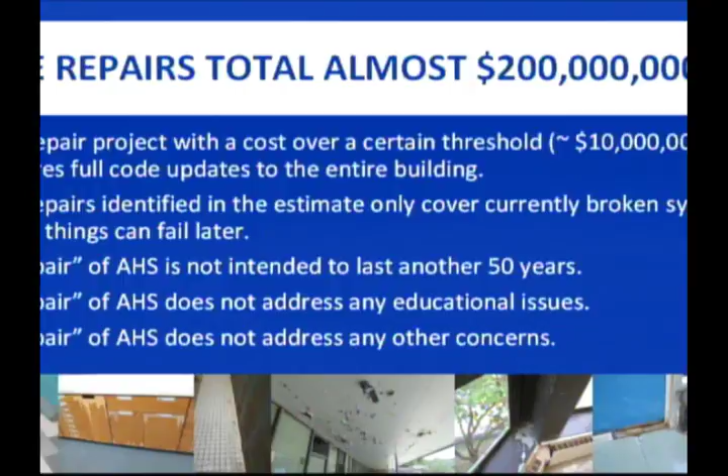So the heating system is nearing failure. It's going to require not only the replacement of the boiler, which is on its last leg, but also the replacement of all those heating pipes. To replace the heating pipes, you have to rip out the floors. That entire project will cost over $10 million, certainly.

Once you spend that $10 million on the heating system, you now have to bring the building up to code. You have to do things like rip out the auditorium because the grade in the auditorium is too steep under ADA. You also have to address egress issues—there are plenty of parts of the building that don't have a second exit. So you have to start worrying about things like that.

The building has multiple levels all over the place, and all of those have to have ramps installed. We have to put in a fire suppression system. But the height of the ceiling is too low to put in the ductwork for both the fire suppression system and a new heating system, which means you're going to have to raise the roof on the building.

So once the heating system goes, all these other projects become a requirement, and all of that adds up to $200 million.

It's important to note that that $200 million is just a repair of things that are broken, not a repair of everything in the building. It doesn't address any of the educational issues, and it doesn't do anything else. A repair option is not designed as a 50-year option. So that $200 million is not buying you a new building, it's buying you a Band-Aid on a very old building.

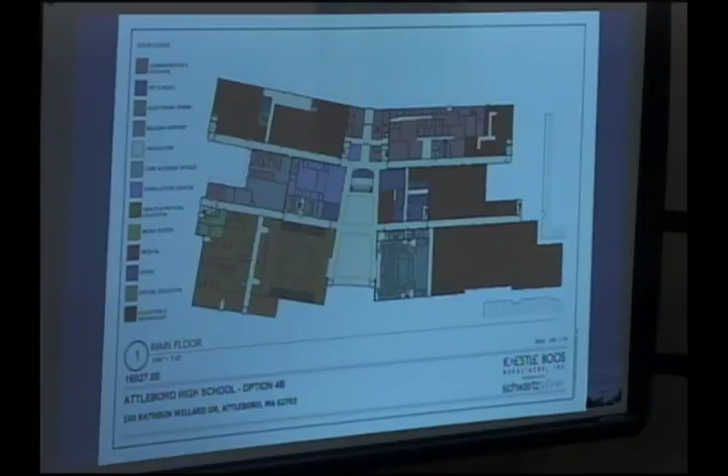The other CTE programs are over here. Autos right there, so people will be able to drive in and out. You'll notice the gymnasium here with locker rooms, and this is the auditorium. So basically you have a central spine that allows circulation between the different parts of the building, and then you have these different sections down on the first floor.

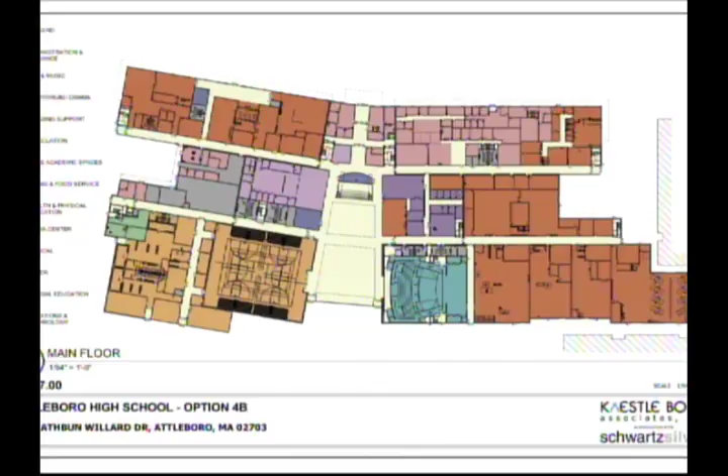No academic classrooms on the first floor, but lots of these other programs. And this wall right here is a glass wall that you'll see a little bit later that opens out onto the stadium right here. So we really believe it's going to integrate very nicely with the site as it already exists.

Any questions about the first floor? Anybody have any questions regarding the first floor?

Okay, so if we move up to the second floor, we see the continuation. This is still the gymnasium, actually that's a two-story structure. Again, the auditorium has a balcony, so that's also a two-story structure.

We have a few more CTE programs on the second floor, on top of them over here. We have art classes here, nurse's office. You'll see that the cafeteria is open to the second floor, and there's a balcony around it. Again, that really helps to create a wonderful space.

Over here we have our alternative programming, the ACA and the network. And then now we move up to the front of the building, and we start to see the definition of our academic spaces. You'd bring network to the high school? Yes. Excellent, thank you.

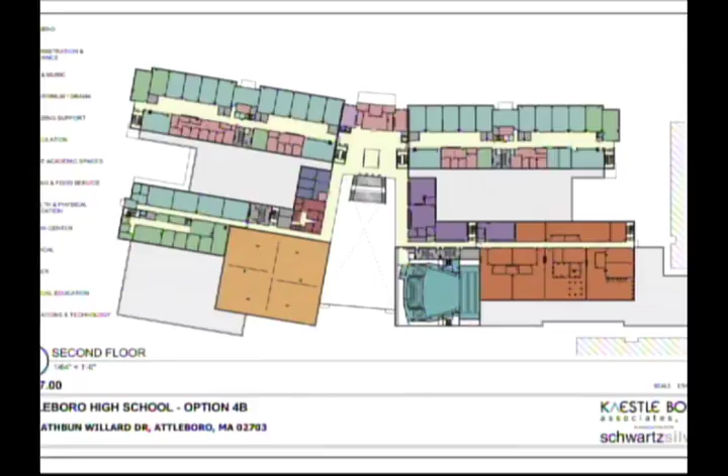So you'll notice, these are administrative offices for the high school. The Attleboro High School is broken currently into houses. Those houses help us to break down the scale of the building.

One of the things we know as educators is that the relationships we make with kids make all the difference in terms of their overall academic success, and that while there are great advantages to having a large high school like Attleboro High School, it allows us to offer programming that other schools couldn't possibly do because of economies of scale. One of the downsides to having a large high school is that it can feel very large, and you can easily get lost in a building of that size.

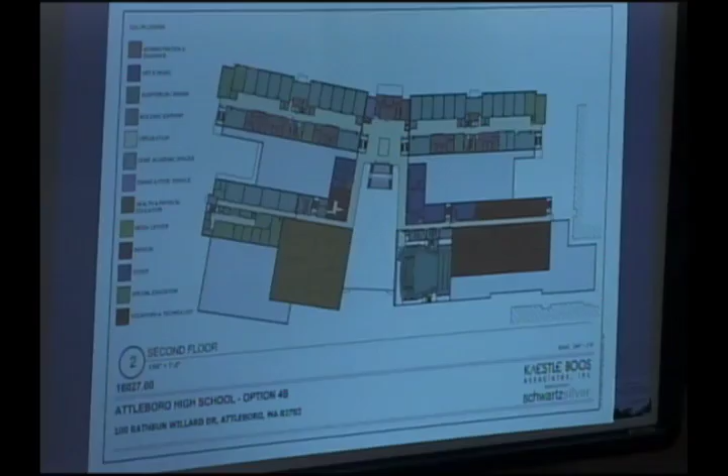So by breaking the building down into houses, we try to create smaller scales so kids can get to know people and make those relationships. We already have that structure, although I have to tell you, the layout of our current building really sort of undermines our ability to make the most of those structures. This building is designed specifically to capitalize on those houses. So you start to see how we have 4 houses, and they are defined structurally by the building, and they are vertical.

So they exist, all 4 of them are on each of the 3 academic floors, the second, the third, and the fourth floor. They go vertically. Each of them has their own house office, so 1, 2, 3, 4. That's where the dean's offices would be, and these are academic classrooms. Again, this would be the classes for this house, this would be the classes for this house, and this house.

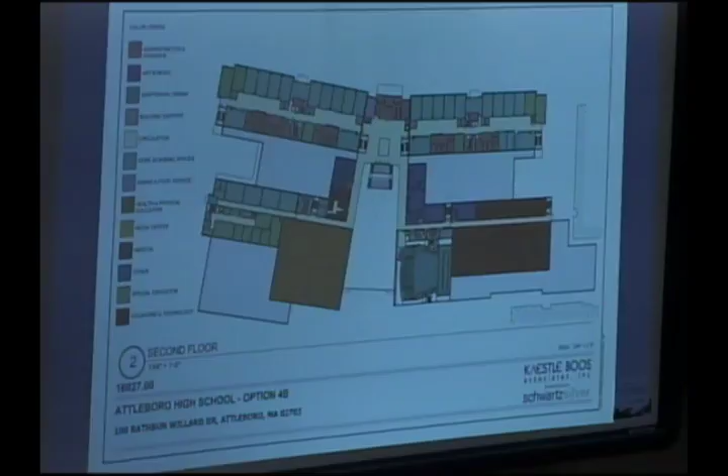All right, so I'm going to go up to the 3rd floor unless there are any questions. Are there any questions on the second floor? Again, if you have questions, just raise your hand and let me know so I can send them to Mr. Sawyer. Okay, going to the 3rd floor.

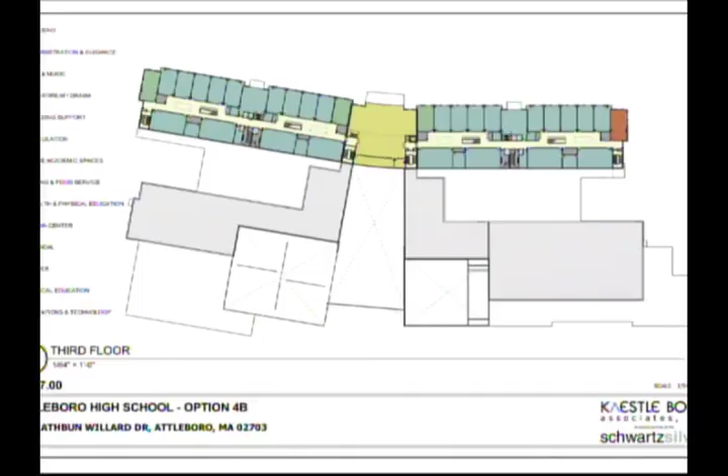So when we get to the 3rd floor, we're now just up in the front of the building. And again, we see the further development of these houses, the structure of the 4 houses. We have a media center in the middle of the building, centrally located. We also have stairwells up to the 4th floor in each house, which helps connect the houses vertically, and also helps bring natural light down from the 4th floor into the 3rd floor, which we think will create a nice, pleasant environment that allows kids to use the flexible space we've created in the halls for collaborative work in breakout spaces.

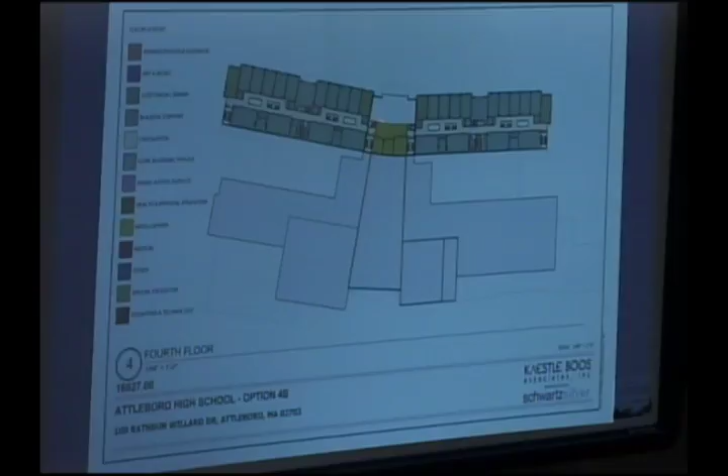And then up on the 4th floor, it's more of the same with the different houses. Again, the media center is in the middle, and it has a balcony that's open down to the 3rd floor, and this is up on the 4th floor. So that's the floor plan for the building.

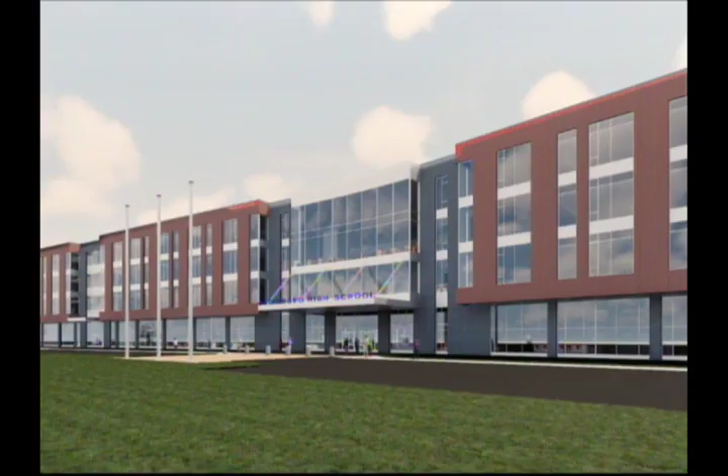Okay, thank you. So here's what it looks like when you step outside of it. This again is the front of the building. So we're over kind of near Rathbun Willard Drive, and you'll see the definition of the 4 houses. They stand out in the design, so you can see them visually from the building.

You have the central clear location. I tell you, it's one of the toughest things about Attleboro High School: when people who don't know the building come there, they don't know where to go, they don't know what door to go to. Literally on the way out the door today, someone stopped me and said, I don't know where to go, where am I, I'm supposed to be here. We think it's a huge advantage that we're going to have a very clearly marked front entrance so people know how to get into the building. It seems like a simple thing, but it'll be an improvement.

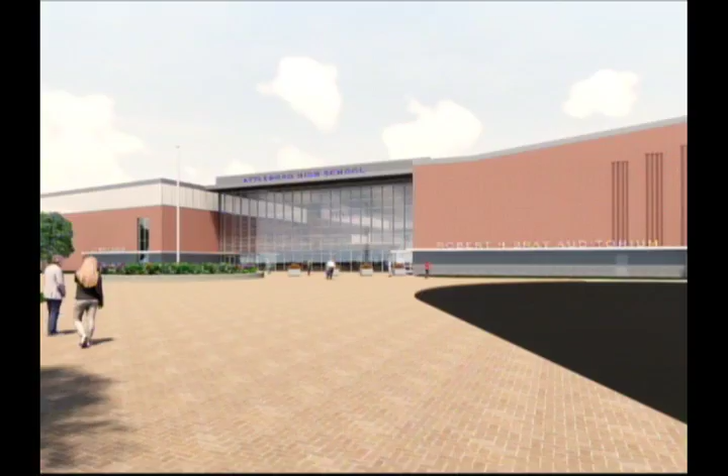And you can see, so it's these 4-story structures up at the front. But when you go to the back, it has a little bit of a different look. And again, there's that cafeteria with the glass wall, the student entrance on the back, looking out onto the stadium, which is over here. And you can see that gymnasium and auditorium.

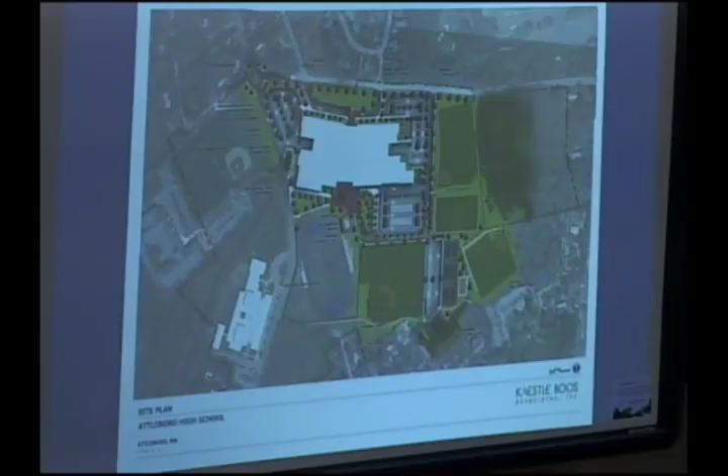I should go back and mention, I forgot to, and I apologize, on the site plan. So again, that's where we just were, kind of over here. I should say that the plan includes, here is the student parking. We have photovoltaics in the parking lot, so we're going to put up solar panels. It creates almost like a carport. They have them in other parts of the country. I've seen them in Florida personally. I know other people have seen them in other places.

And those solar panels help us get our LEED certification, which adds a 2% increase on our reimbursement rate. So that brings in millions of dollars into the project. It also will produce, we estimate, about 5% of our electrical usage each year, which will help. Yeah, only 5. Yeah, I had that right, Joe, right? Yeah, it's a big building. 250 kilowatts.

That's out in that student parking lot, so I just wanted to point that out to you. So when you're here, you're coming in from the student lot, and that's the bus loop right there. So that's the basic layout of the building.

We're very excited about it because we believe that it will meet the needs of our students and prepare them for the 21st century. We think it'll do so in a way that is most responsible for grappling with the crisis we face, in that the building we currently have is nearing failure and will require drastic action in a very short time frame. By doing it this way, it will have the least impact on the city's finances, although it's certainly a significant project any way you do it.

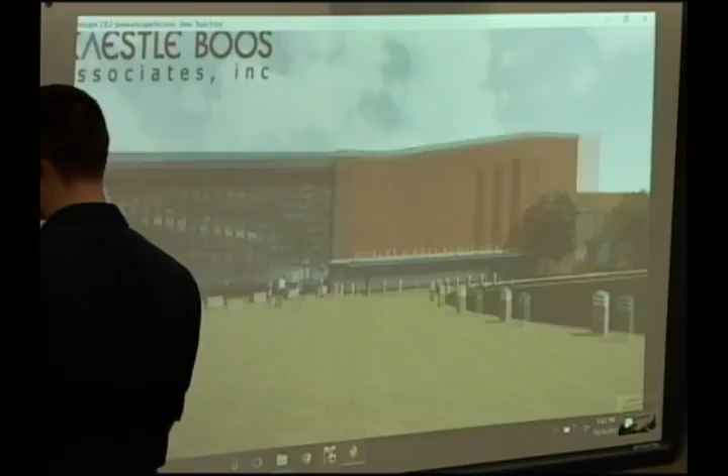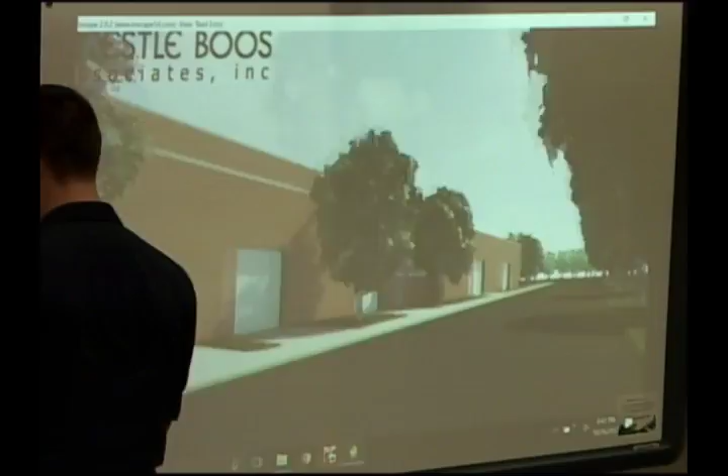Perfect, so this is the bus loop. And we've got the auditorium on the left, and these are our CTE programs. I think carpentry's the first one. I forget the exact order, but I do know that auto's on the end, which would be right there. So you drive your car in - I don't know if that's in or out.

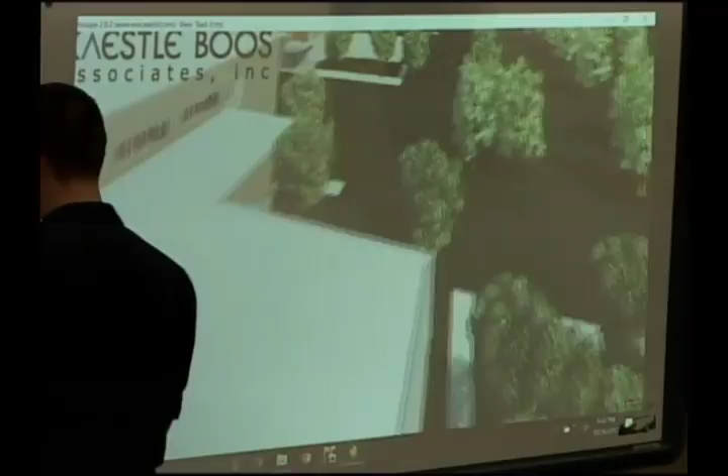Now I'm flying. Again, this is the CTE wing on both floors, right there.

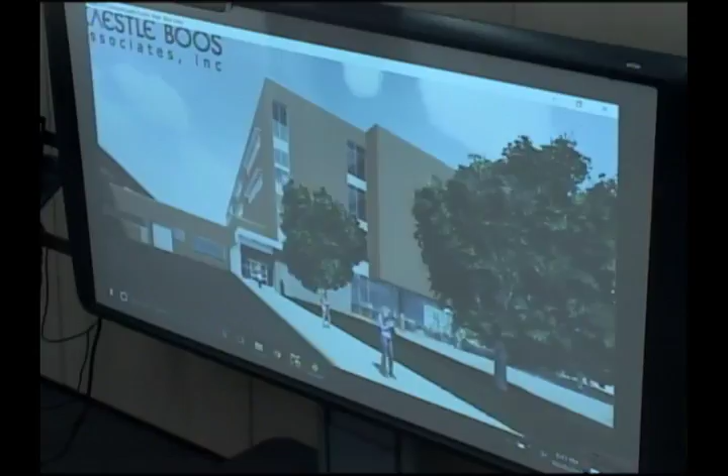This isn't a program tour. You can go anywhere you want, so if you see someplace you want to hone in on to view it, just let us know and he can stop and show you rooms. So this is the end of the classroom wing.

If you go back just one moment, we can point out that this entrance right here is not actually a public entrance. This would be the teacher's entrance from the teacher's parking lot, and that will have a secure system, so they'll swipe or some way or other to get in. That will not be any place that the public has access to. So that area right there is the playground for the child care center.

And here we come up to the front of the building. Again, you can see how the four houses are pronounced as we move.

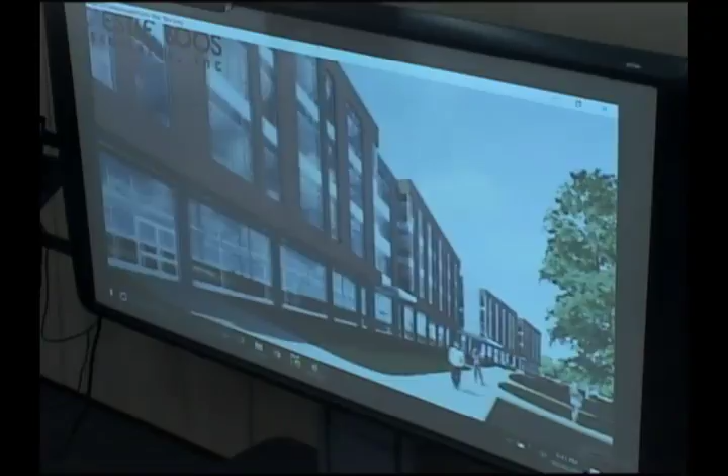So that would be the door to people who are visiting central office, and the security works such that you get into central office, but you don't get into the rest of the building.

And then that would be the front entrance to visitors to the high school. And then the third house, and we have the entrance to the CTE programs.

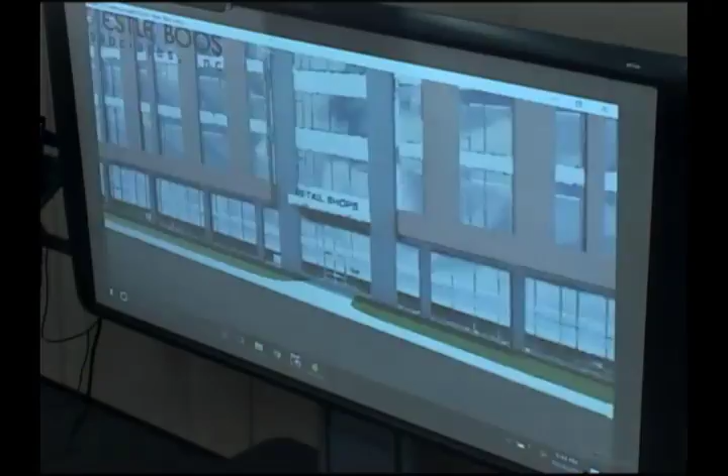Can I ask a question? Yes, Councilor Parika? Thank you, President Cook. So in the front part of the building, you'll be able to park visitors who are coming from outside, not school participants, but community as a whole, can park in front? Yes, similar to how they do in the superintendent loop now, but with much more - with enough parking spots to actually make it useful.

Okay, thank you. Yeah, and one of the other things that we tried to do in the site plan was to take the teacher parking, the student parking, the bus loop, the drop-offs, and separate them all to the greatest extent possible, because if you have been out there in the morning now, you know it's kind of interesting. And so paying attention on the site there to... Won't be like Fury Road anymore. Yeah. Thank you.

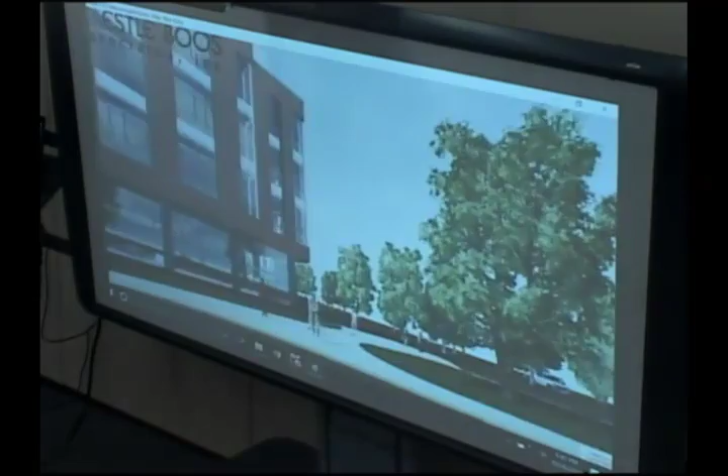So then we get to the end of the four-story academic space, come around the corner, following along the newly reconnected Rathbun Willard.

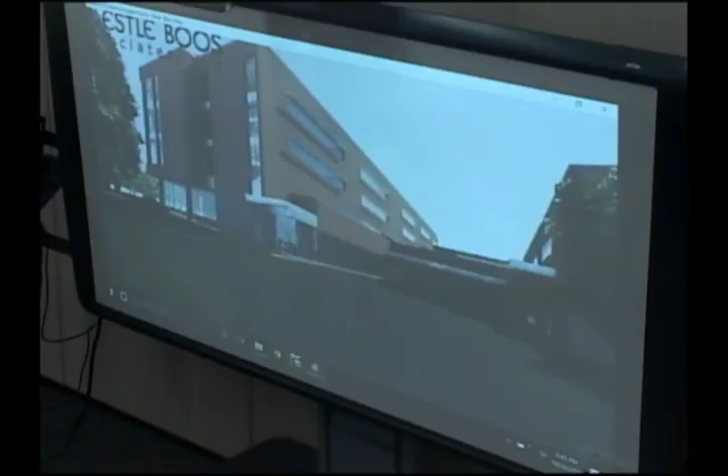That's the loading dock, so that's where culinary is right there on the end, so they'll be close to their deliveries to the kitchen for the cafeteria, plus custodial deliveries as well. And then that's the entrance to our alternative programming, the ACA and the network, through that door.

As we come around, those are the locker rooms.

Councilor Parikh, you had a question? Thank you. So the locker room is specifically for the gymnasium, and will there be lockers inside the school in general, or no lockers?

So we've had quite a bit of conversation about lockers. There are lockers in the building, in fact quite a few, but most of the lockers are going to be program specific. So if you're in a CTE program, your locker's in your CTE space. We also have lockers in performance spaces, so for students that do after-school activities, they have locker space as well. And then students will have access to a locker for their sport during season. So when you add all those lockers up, there's a pretty significant number. But what you will not have is lockers lining the halls on top of all those.

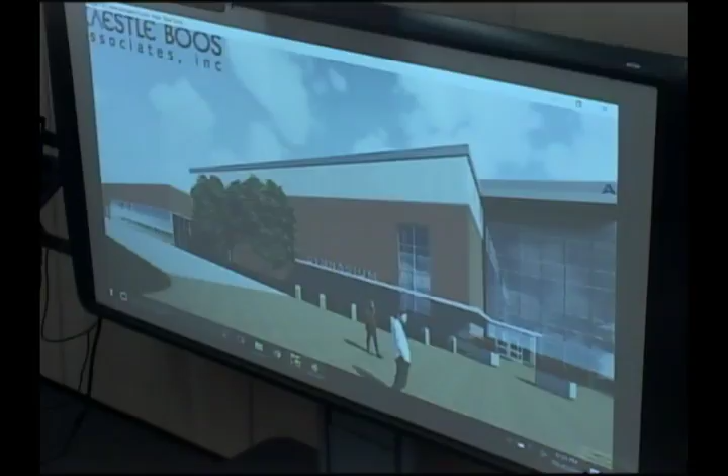I know the park, we have to work out the parking arrangements. Okay, all right, so we're back to where we basically started at the back door. At this time we'd like to actually enter into that cafeteria, which again we think is one of the real highlights of the building.

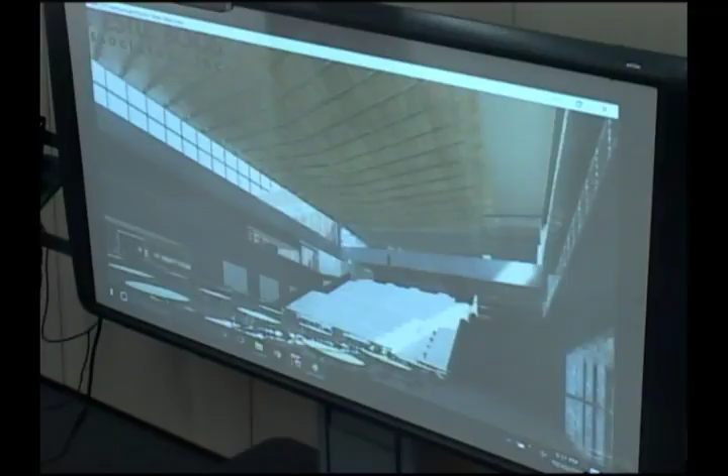So at the far end of the room, you'll see that those windows are into the library media center, right up in there. You have windows along the top to let in natural light. If we look the other way, you've got the gym on the right, you've got the auditorium on the left.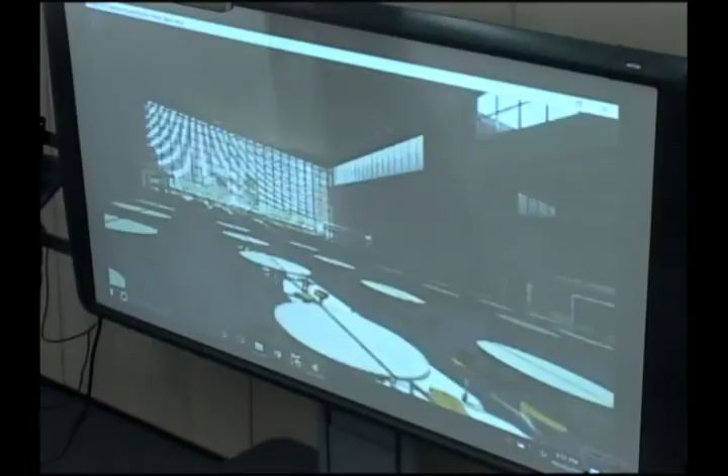And that large space we think the city of Attleboro can use in a lot of different ways. One of the things that always amazed me was that when we had a function in the auditorium, there was no place to come out afterwards for a cup of coffee, cake, or other things. We've arranged this so that the cafeteria is available at halftime of a basketball game, intermission of something in the auditorium, or before or after. It ends up being a staging area, very useful for events occurring in the nighttime, so we paid attention to that.

And again, it'll be looking out onto the stadium.

Councilor Hall: I noticed the balconies that you have. Do you have those types of balconies in the facility right now? Sort of an open balcony? We do have balconies at the high school. It's balconies and railings of that sort? Not open railings like that. You will see half-height walls.

In the media center area, stuff like that, where the assistant principals and some of our other student support services are located on the third floor of the library area, there's a balcony area that looks over, but it's not anywhere near as impressive as this in terms of the interaction between students and the rest of the school community. Thank you, okay.

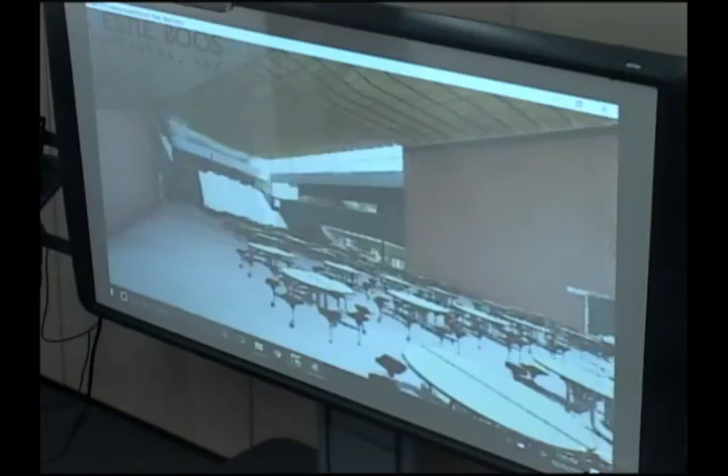Thank you, for the cafeteria utilization, if we're losing capacity in the auditorium, I'm thinking towards graduation, is the plan to have additional bodies in the cafeteria for that point for graduation, or for times when it's inside? I think for graduation, we will have a larger gym.

So right now, I was in the unenviable position of having to make a decision back in June, and we decided at the literally 11th hour that we had to move it inside. And when the lightning started crackling overhead, I felt vindicated. You made the right one. You did it.

But the fact that we have to limit the number of tickets for attendees when it is in the gym, as Mr. Jacoby said, a much larger gym now that would be climate controlled would probably be our first option. But this beautiful space would be something that we certainly would investigate the possibility of a ceremony.

Okay, thank you. Councilor Hall, and then Councilor Conti? And I apologize if you're going to get to this in your virtual tour, but I have a great love for the CTE program. And so where is the culinary? Is it located near this area so that if there were functions as you've done in the past? I'll take you right there.

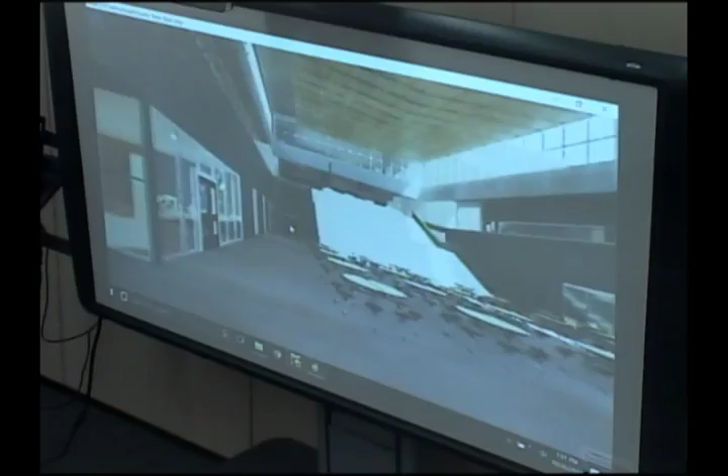It's around the corner. And I know that Principal Rooney wanted to address you all on the programs that we have and the programs we're adding. So that may be a good segue to him after we get down this hall. I'm amazed at the technology that allows us to walk through the buildings.

So the culinary program isn't co-located with the cafeteria? It's a ways, okay. The positioning of the loading dock, we receive so many deliveries to be able to have the food be as fresh as possible, but also to make sure that we're not over ordering and having food go to waste. We did discuss that with the MSBA. They provided us some feedback on that, but we made the decision to keep it in the mall area, but to have it in a place where it was more practical with the loading dock.

With the way our culinary program already transports food to B1 for certain functions, like the Big Read has a function at the high school tonight. I believe they're using the bistro, but there have been times past where they've used B1 cafeteria. So although it would be a longer trek to the cafeteria, that's part of the relevant experience for our culinary students.

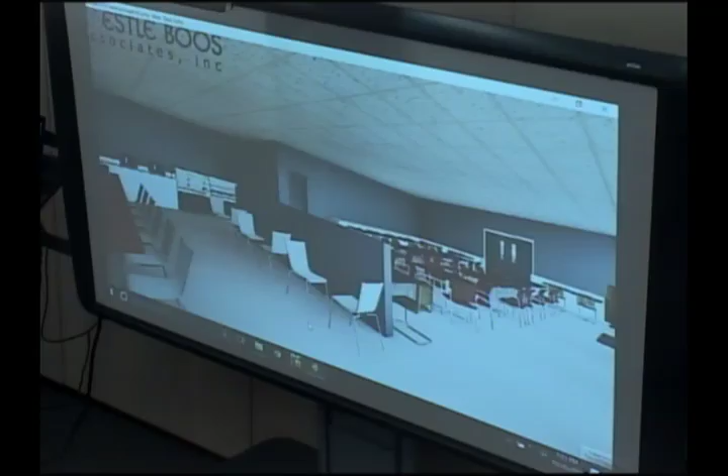But it looks like this is closer to the culinary program then. This is the so it has almost, this is the restaurant associated with the program. Okay, it's the new bistro. It's at the front of the building in that public interaction.

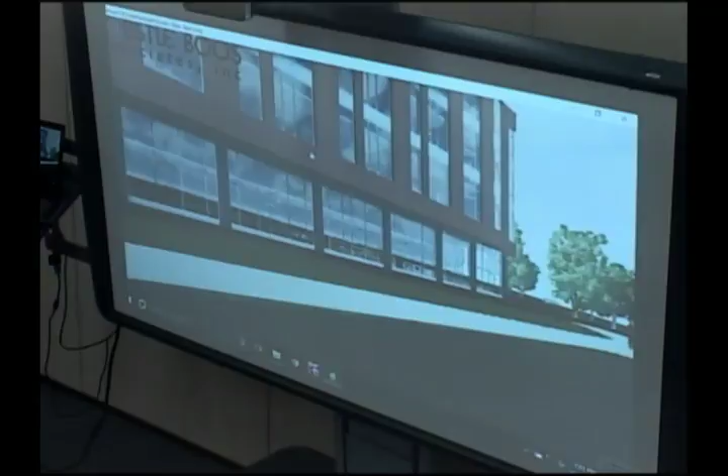Okay, right. Without going back on the computer, if you look at the floor plan of the first floor, you will see probably the second page you have there in your package. You will see over on the top left the entrance to the CTE mall, and you'll see there's a hallway that goes back behind it. Oh, I see. And that's controlled access so that teachers and students with access can get through there. But they actually could come down the hall to the cafeteria from there. But you have to.

In a building of 260 million dollars, you have 260 million decisions to make. That's okay, you answered it fine. So that's we, thank you. We've been weighing these things carefully.

Okay, Councilor Conti? Thank you. Yes, you were talking about the auditorium, and I think it's appropriate to talk about the scale of this building. This is a very, very, very large building. That auditorium is 45 feet high.

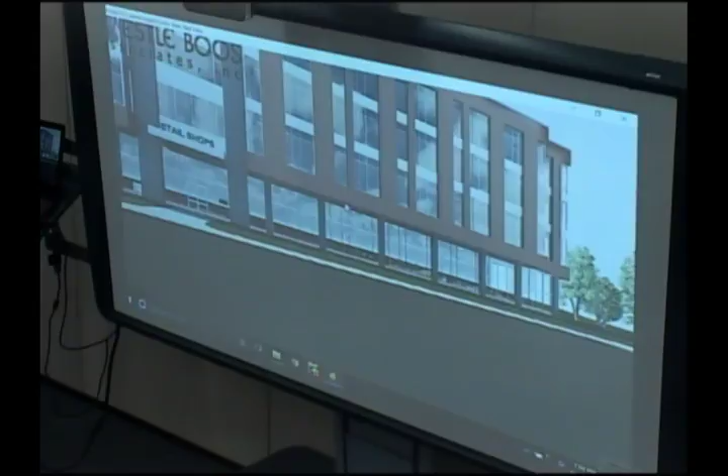The walls in that auditorium are 45 feet tall. That front wall is 150 feet wide, and that's smaller than the back wall, which is even bigger. And it's 220 feet from the glass wall to the front wall. So the volume of that auditorium alone is bigger, almost bigger than City Hall.

That's enormous. The front wall of this building that faces Rathbun Willard is 45 feet tall and 467 feet long. It's enormous. This scale that we're looking at is 1/64 of an inch to a foot. It doesn't do it justice. This is a very, very large building.

I'm pleased with the revised fascia. I think it's going to look very nice. I'm glad that it's evolved to where it is. But I wouldn't want to be standing on a corner during a windstorm, because that's going to be incredible. You could almost hang glide off the top of this building. It's a very big face.

The other thing you didn't touch upon, Mr. Sawyer - I wonder if the school has given any consideration: if this building is constructed as planned, is this a 50-year building? Is this a 75-year building? Is this a 100-year building?